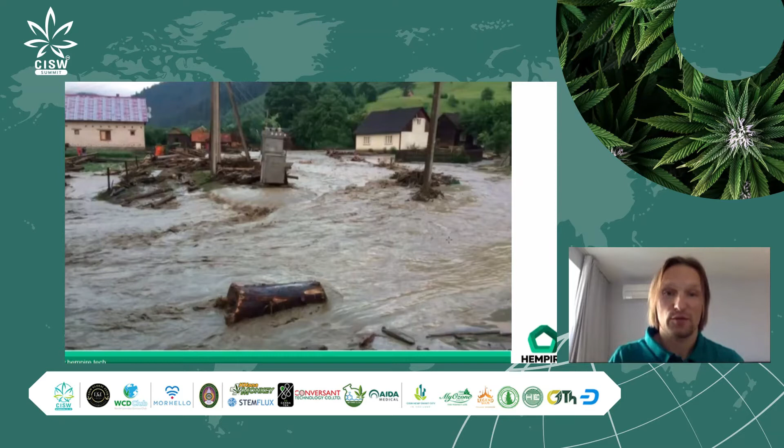The root system of one single tree can hold up to 10 liters of water. So chopping down trees at the top of the hill results in seasonal floods, and the village that sits right at the bottom of that hill suffers a lot. So we need to understand the consequences of what we're doing.

So basically, after August 1st, we're taking a credit line from the planet, and that's from 2016. So we see really bad results, and there is no way of stopping it unless we start using natural regenerative resources.

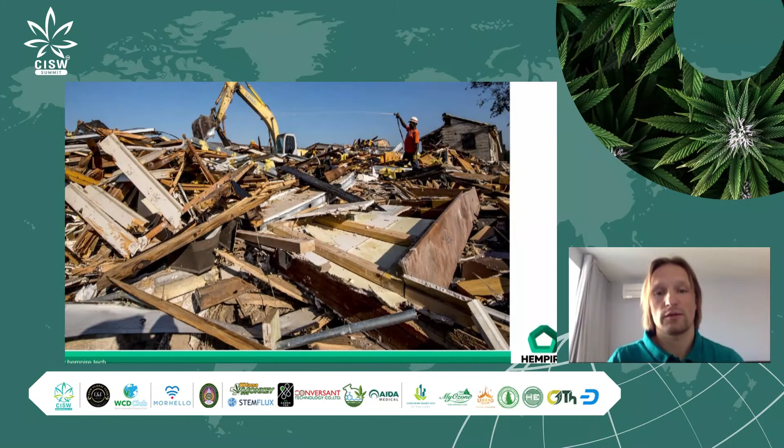Here, the amount of trash. I don't know if any of you have ever done renovation or construction. We have seen crazy results, and the amount of mass that is produced from one single construction site is very sad to see. I'm going to skip this step. So we started to build buildings fast. We started to build buildings economically, but the quality of materials was always subpar.

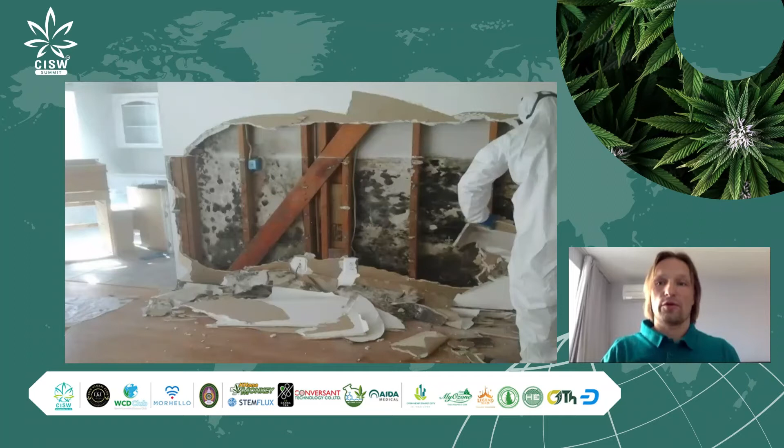As you can see, this is just a result of the mold growing behind your walls. Even though it's nice, beautiful gypsum boards, painted, beautiful house, probably costs a lot of money, the quality of air that people are breathing in there is detrimental to the health of the tenants.

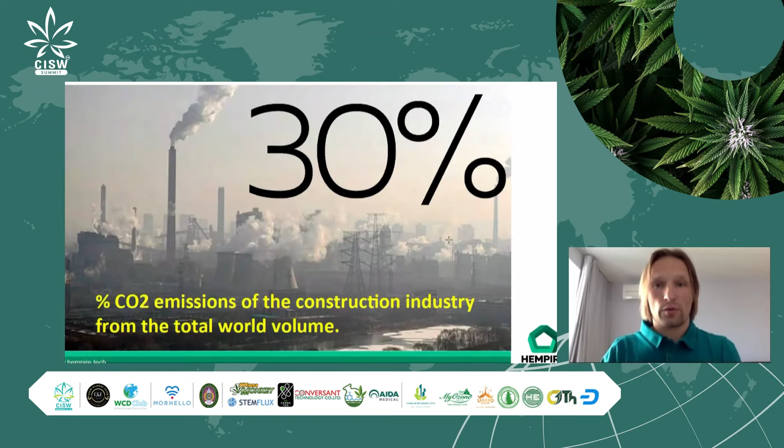So the construction industry is one of the biggest polluters in the world. About 30% of all the emissions on the planet come from construction. And of course, that results in low quality materials that create all kinds of health issues and massive carbon emissions. In order to produce something, you need to use a lot of energy. So the solution to all of this is, of course, carbon negative hemp houses.

And so the difference: the hemp grown for CBD is a bushy flower plant. The industrial varieties of hemp are also being grown for CBD, but it's a dual type crop. So you can take the top off and bring it to the extractor, and then the bottom, the rest of the stalk, goes to the processing facility.

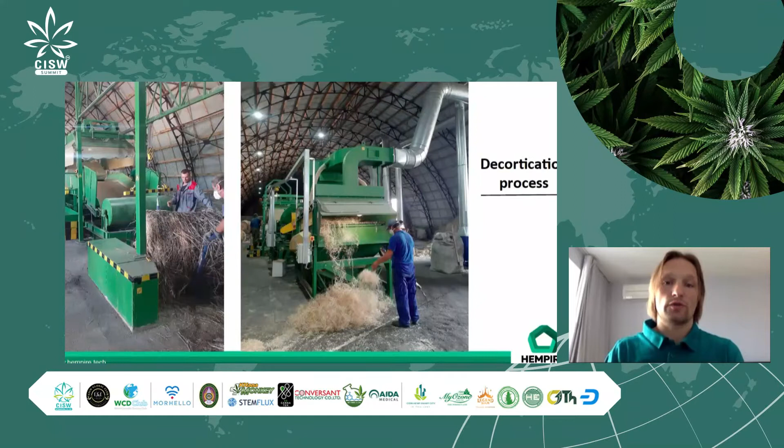So once the stalk is harvested, it's brought to a special facility. It's called the decortication facility, where they separate the fiber and the hurds. Fiber goes towards the textile industry, paper industry, bioplastics, and composite materials, whereas hurds were considered to be a waste before, but now we're successfully using them in the construction industry.

So in Hempire, we have developed our own all-natural binder, a lime-based binder with no cement or any type of toxic components. And basically what we do, we mix the processed hemp hurds and our Fifth Element binder in water for 1 minute in a specially designed mixer. And we produce a porridge-like substance. It looks like oatmeal mixed with flour and water, that sort of stuff.

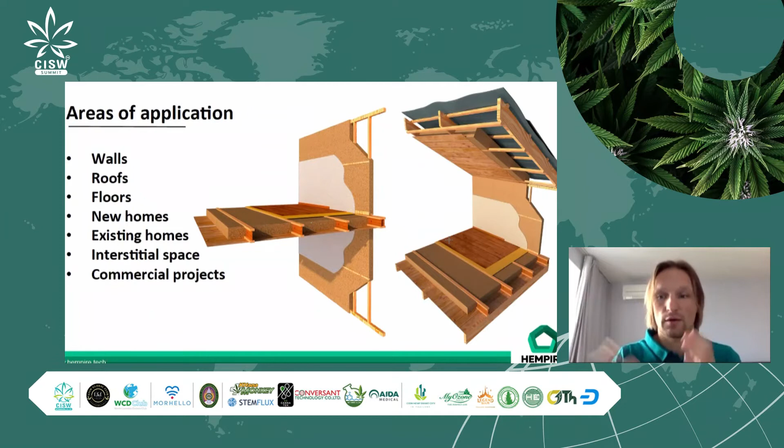And with this mixture, we can insulate any type of surface, walls, roofs, floors of new and existing buildings. So think about it. You have some type of crop that you grow on the field. You have a facility nearby which can process this crop, and it becomes one of the biggest sources for the construction industry to fill your walls, insulate your roofs, floors, etc. Next door.

So this is just an image of how it has been done. It takes a minute or two to prepare the mixture. Then we have, for example, a timber frame. It can be a bamboo frame. It can be even a brick wall. It doesn't matter whether it's an existing building or a newly built structure. So basically, we install the temporary formwork around your timber frame. It can be plywood or OSB, as you can see.

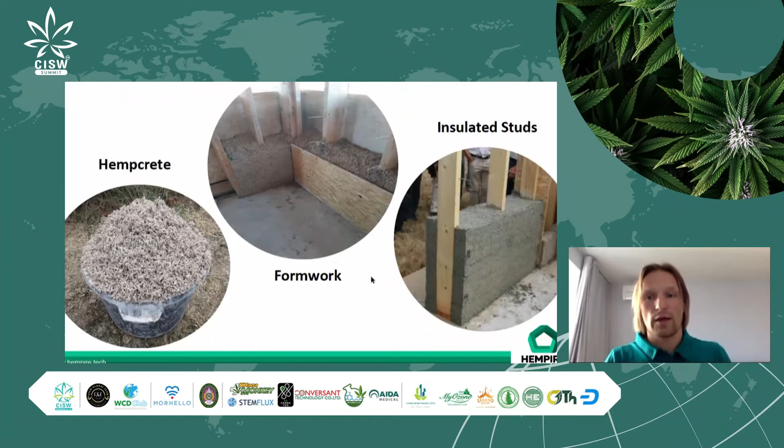And then we start compacting this material in layers of 10 to 15 centimeters. And the beauty of this technology is that we can remove the formwork instantly after we apply the material. And then it starts drying and turning into stone by sequestering carbon dioxide from the atmosphere. It's a beautiful reaction that takes place once you mix lime with water.

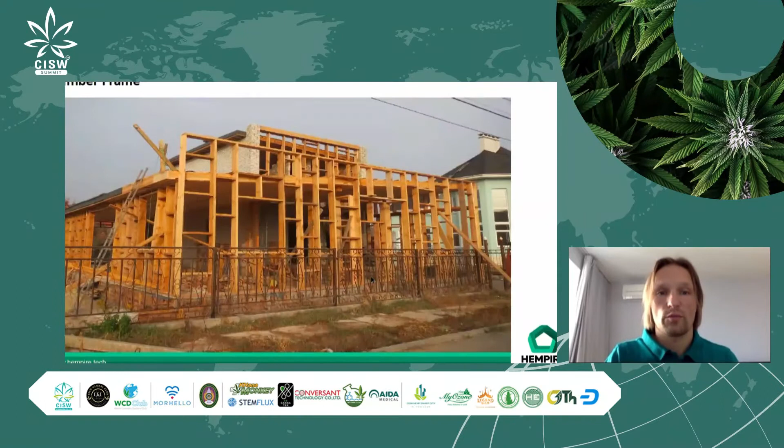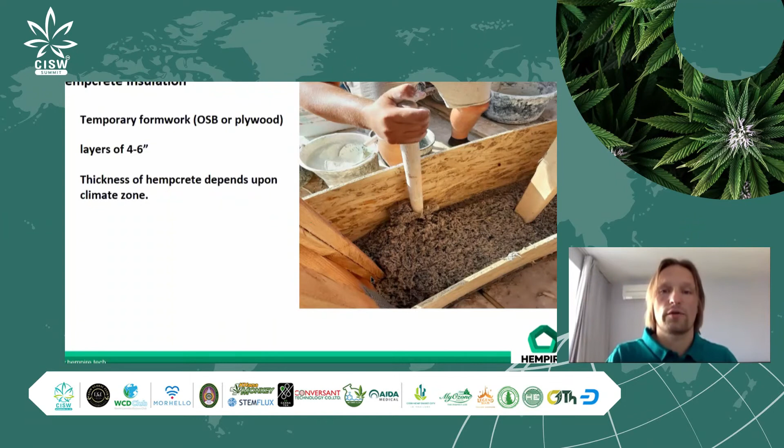So basically, here is your timber frame. Here is our formwork installed around our structural members, and we start throwing this material manually and compacting it very fast. So once you compact the layer, you can throw the next one on top of it, so there is no technological delay. We remove the formwork, we put it further up, and here we go.

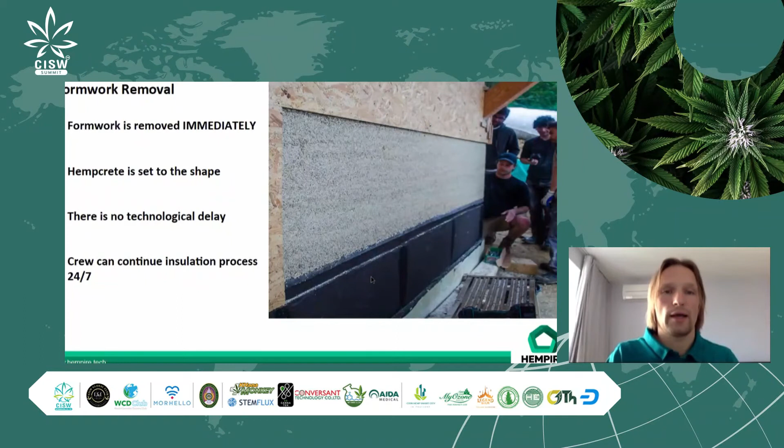So in the end, our timber frame gets fully encapsulated with this material, which is drawing any possible moisture out of your structural frame. So there is no possibility of mold showing up there, or of structural disintegration or collapse. Once you remove the formwork, you can place it upward and start filling up the next layer. So the more people you have on the construction site, the faster you can finish the building. And it's very, very simple technology.

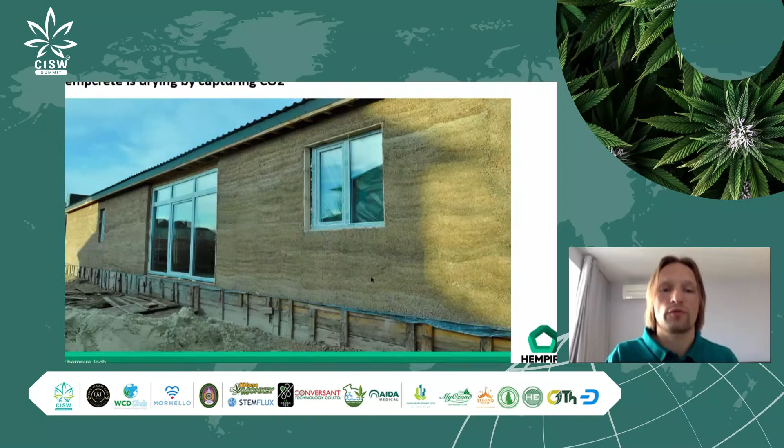And here we see, once we removed all the formworks and insulated the structural timber frame in the images shown previously, the carbonation process starts taking place. This is where the CO2 gets sequestered by the material from the atmosphere to make it a stone-like structure.

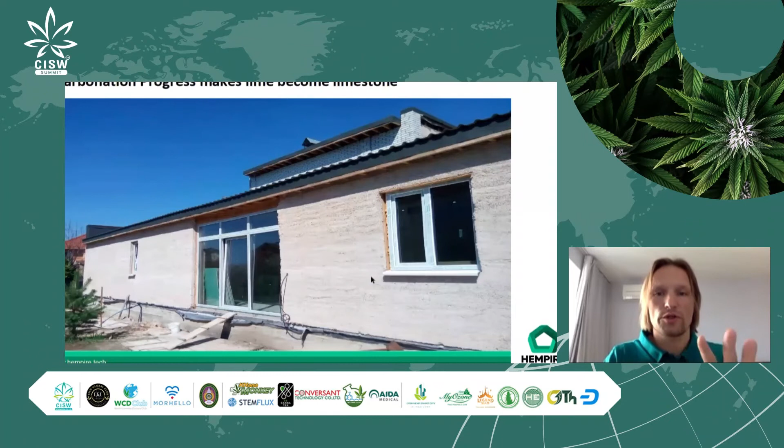So as you can see, there is no thermal bridging. This is all one uniform material, which will get plastered in the end, and the house is ready. So you don't need to use any type of membranes, because this material is not afraid of moisture. So we are completely eliminating use of toxic materials or some type of plastics.

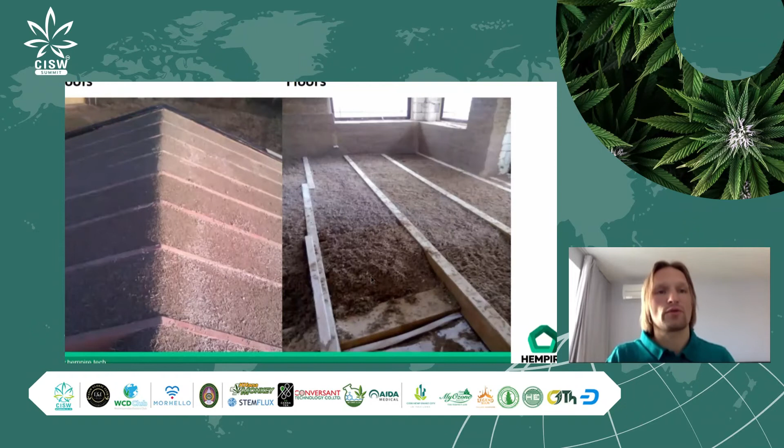So the beauty about it is you have your timber frame, you have your insulation material, which acts as a wall partition at the same time. You plaster it from the inside, you render it on the outside, and the house is ready. Here we have examples of roof insulation, floor insulation.

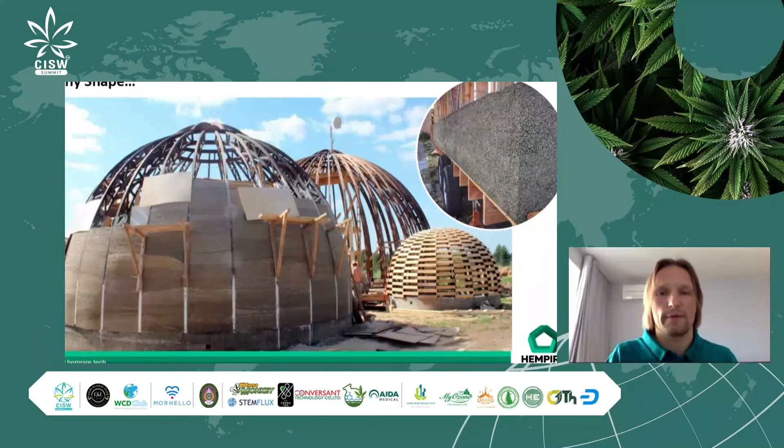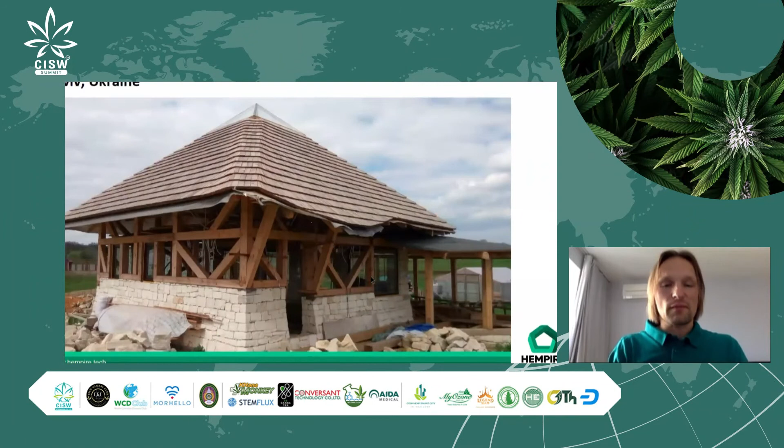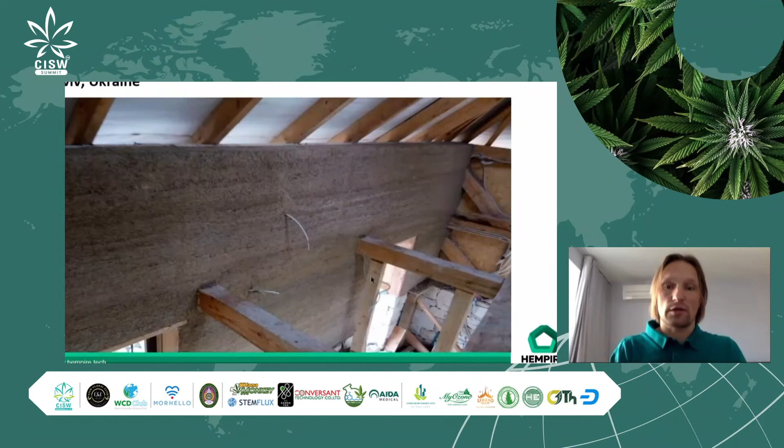Because if it's just a traditional brick wall or a gypsum board painted with some type of paint over it, it doesn't excite people. But when they start seeing this natural shape and texture, they absolutely fall in love with it. So here I'm just going to show you different types of buildings that we have completed, just to show you that this technology already exists. People have been using it. There is quite an experienced group developed around the world that's starting to use this technology.

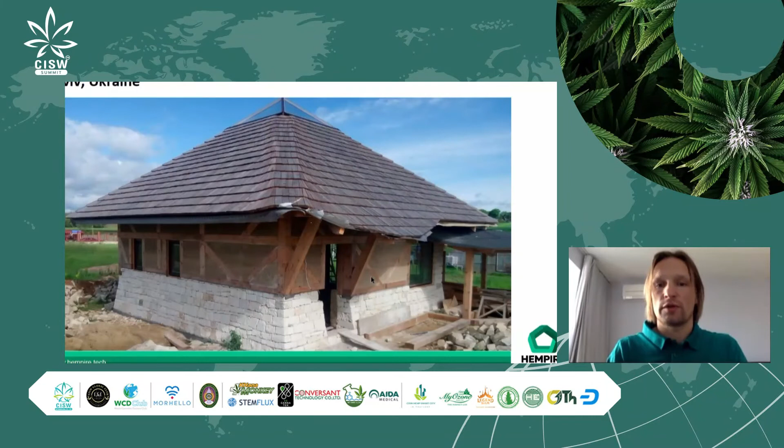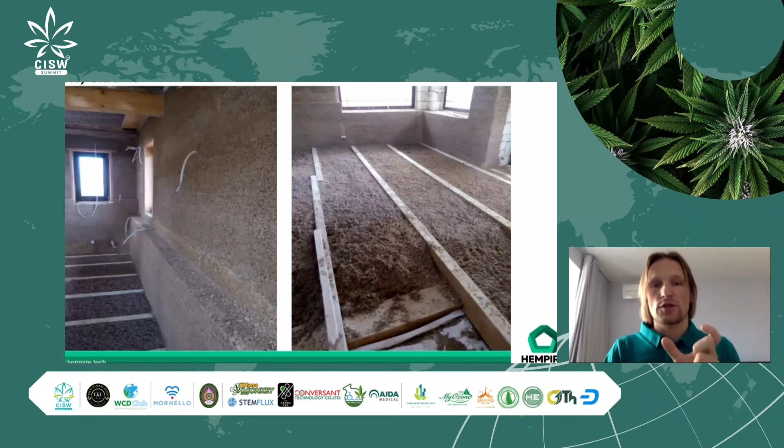I got introduced to hempcrete about 11 years ago, and it completely changed my life. Now we actually consult and help people build in different countries. The possibly next project is going to be in Hawaii for me next year. United States, of course. So here, as you can see, we see a stone house being insulated from inside, floor insulation. The thickness of the insulation will always be dictated by the thermal codes of different countries.

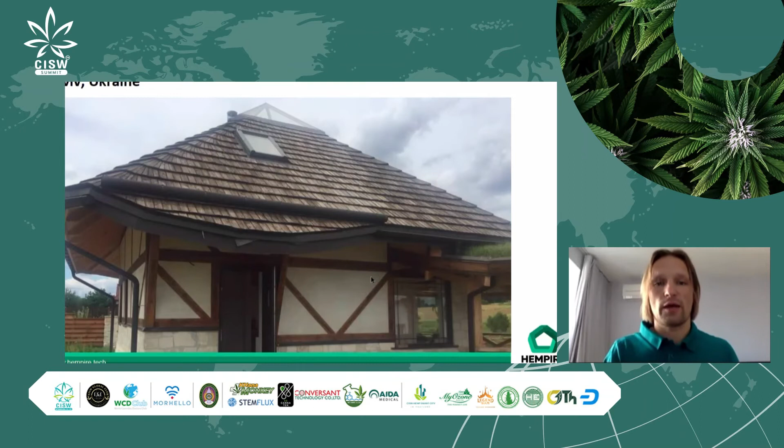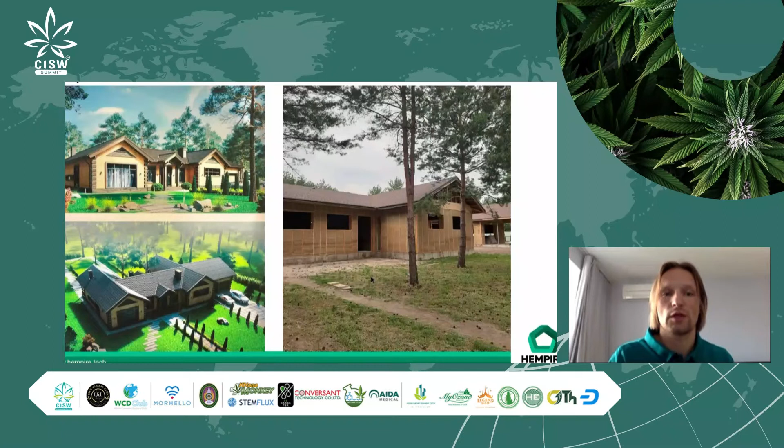One thing is building in Florida or Thailand, the other thing is building in the northern part of Canada, right? So the thickness that we use in Ukraine is between 30 to 40 centimeters, depending on the use of the building. So here you see there is no problem constructing big houses. So it's not just some type of mud huts that people are used to seeing. There are modern buildings that are currently already occupied by our clients.

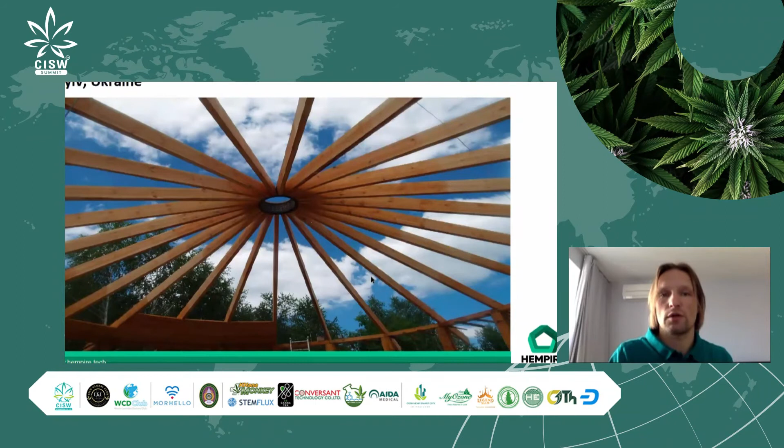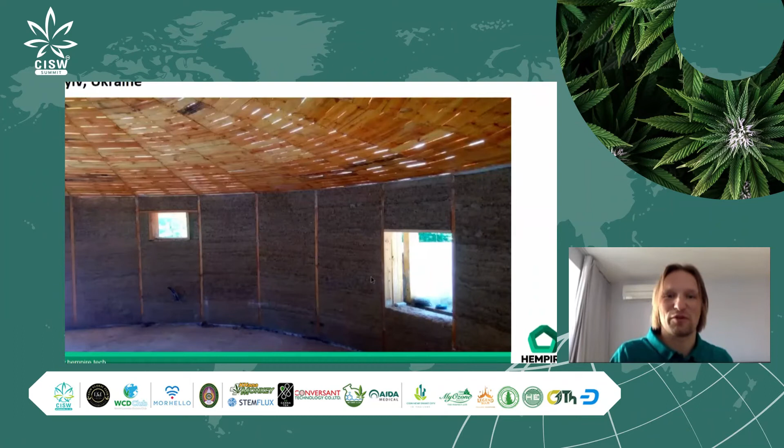All the projects, by the way, that you see are our own projects in Hempire. So these are all real houses, not just some render Pinterest type of photographs. Round houses, stone houses. Some of the clients request an all natural approach. They say, our children have some special allergies to plastics or cement, and sometimes we have to sign a waiver guaranteeing that we're not using any toxic components inside our formulations.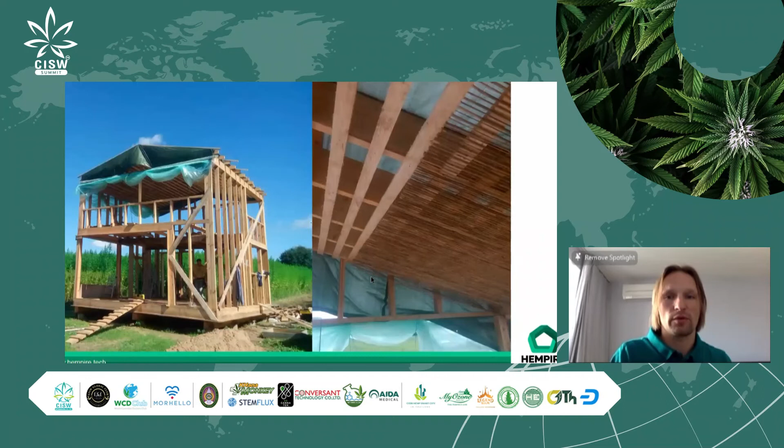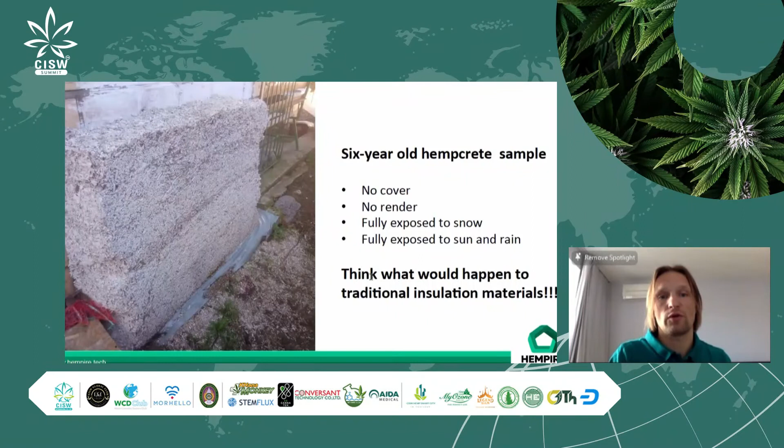Here is the seminar in Poland that we've been running with the local hemp group. As you can see, no one can tell the difference. No one can tell that this type of house is built out of hempcrete and cannabis plant. So as you can see, our sample has been sitting fully exposed to the snow and sun for the last 6 years, and nothing has happened to it.

We have insulated concrete inside during winter time, and now it's a beautiful yoga studio where people just enjoy themselves. Everything is covered with hempcrete floors, ceiling inside. As you can see, all the engineers, all the architects told us this material is going to rot, and there is going to be dew point condensation somewhere in between concrete and hempcrete.

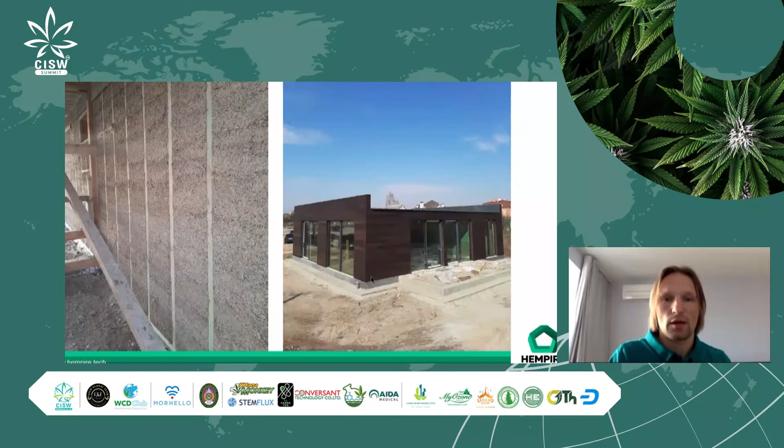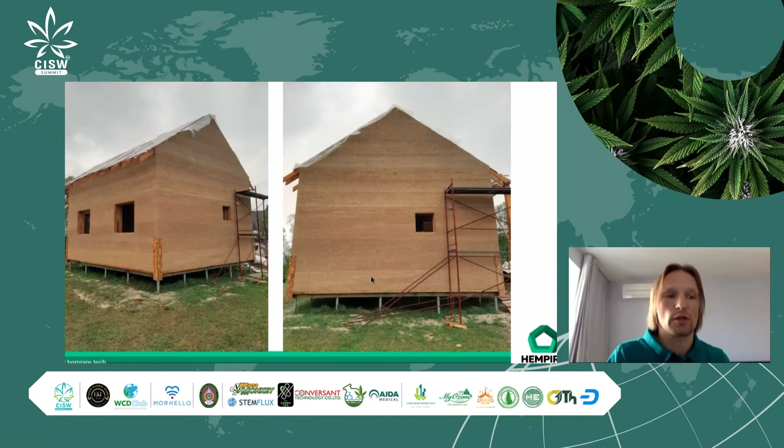It's hard as a rock right now, 6 years in succession. Modern types of shapes with timber cladding, dome houses, as I told you. But most importantly, I want to show you that some of our clients build houses themselves. They purchase materials from us. We teach them how to do it. We let them rent a mixer from us. And this particular project has been executed by clients. This is one of the outstanding projects that we got famous for.

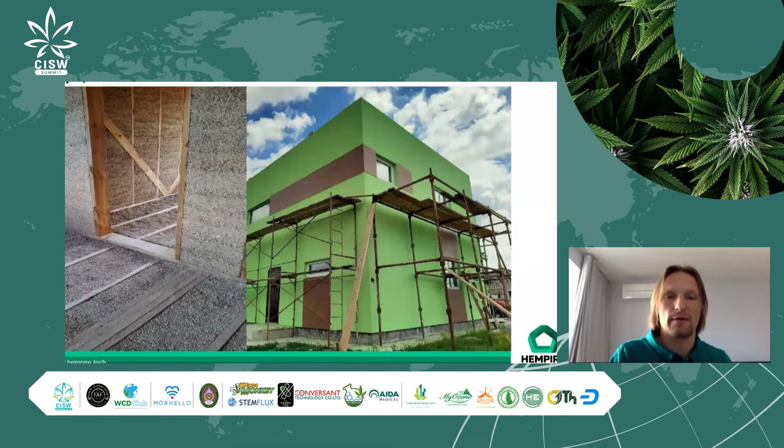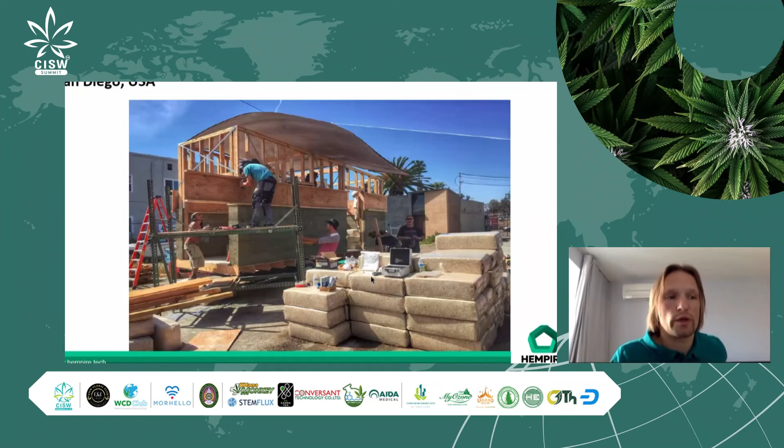This is a real house with the person who has built this house. He's now our partner in helping us build these houses. This is a Mont Blanc chalet, a very beautiful project in the mountains in France that we helped build. This is a house on wheels. These are all very cool types of structures.

But what is the point here? The most important thing is the advantages of hempcrete. As you can see on this diagram, the relative humidity outside the house is represented by the green line, and the blue line is the humidity inside the house. This test was taken in England.

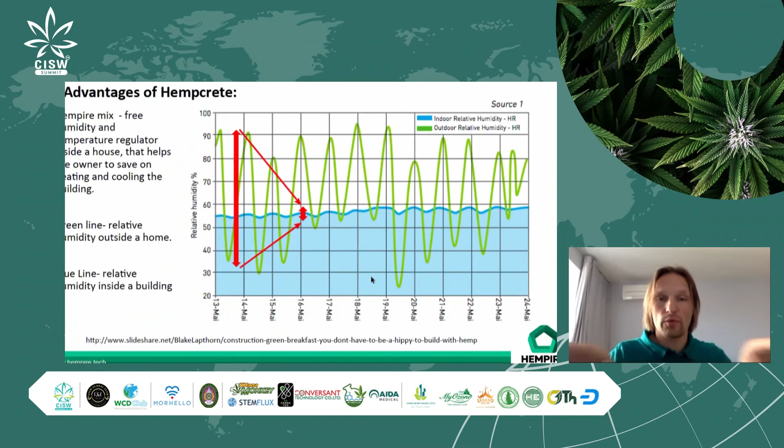As you can see, hempcrete has the ability to negate these extreme fluctuations of relative humidity outside the building, and what creates uncomfortable conditions is the actual humidity inside the house, if the air is too dry or too wet. So hempcrete has been doing this, creating a perfect environment from 50 to 60% relative humidity.

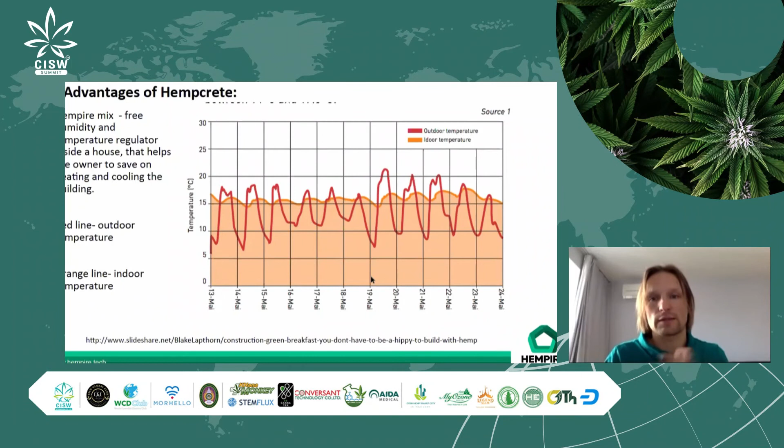The same thing's happening with temperature. As you can see, the dark red line represents the temperature outside the house, day and night throughout like 10 days. And the same is happening inside. So it's an extremely energy efficient material due to the fact that it's very porous.

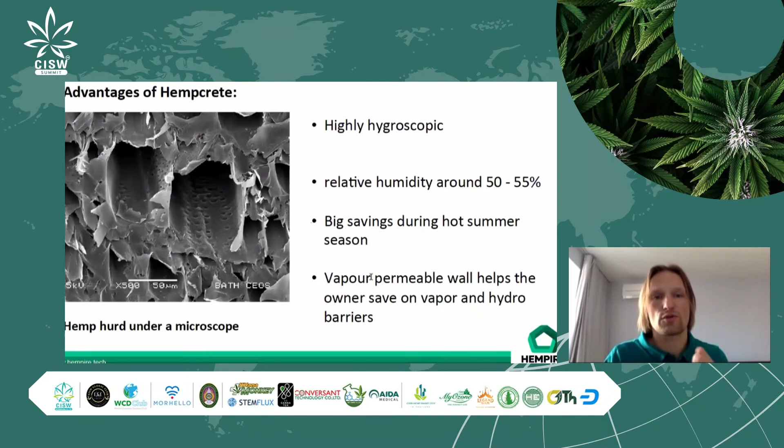This is an image of hemp hurd under a microscope. And due to its porosity, it's able to attract humid water vapor and then release it later on back into the atmosphere. Here, as you can see, the optimum zone. This is actually essential for the health benefits of the people living inside such houses. Bacteria, viruses, fungi, respiratory infections, they all happen in either too wet or too dry an environment. So the optimum zone created by hempcrete is cool.

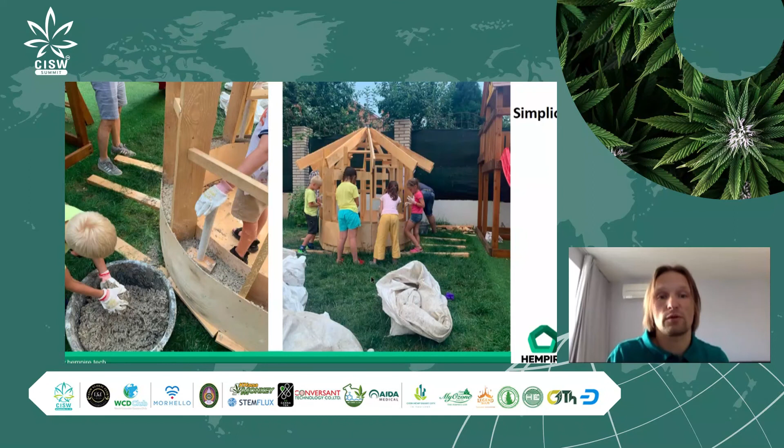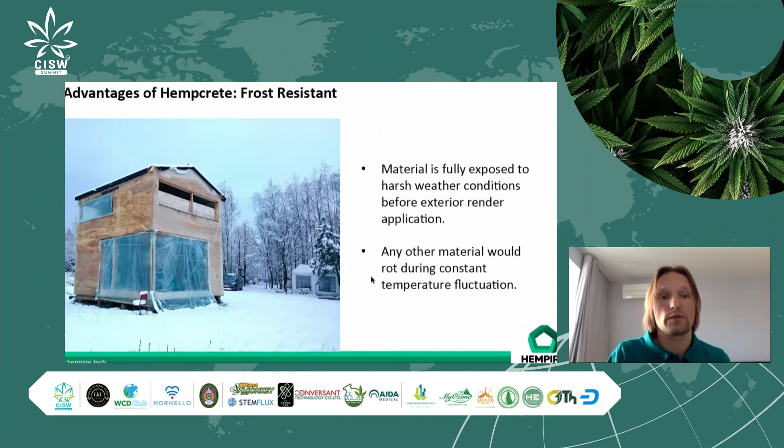We have organized the first ever, maybe in the world even, workshop for children. These are 7-8-year-old children learning how to do it. And they were very, very happy and excited about it. The material doesn't burn, it doesn't rot. As you can see, it didn't crack over winter time. So it's an extremely durable material that can last for many, many years.

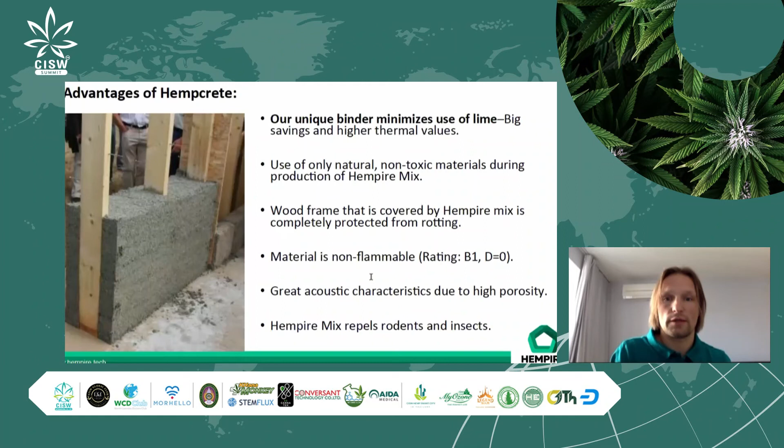It has very good thermal insulation values. It has great acoustics. It is also very good at sustaining different seismic activities. And a very important slide here: this is a pH scale. At 5.8, cancer cells begin to form. And we're using 12.4 pH lime. So it's an extremely alkaline material.

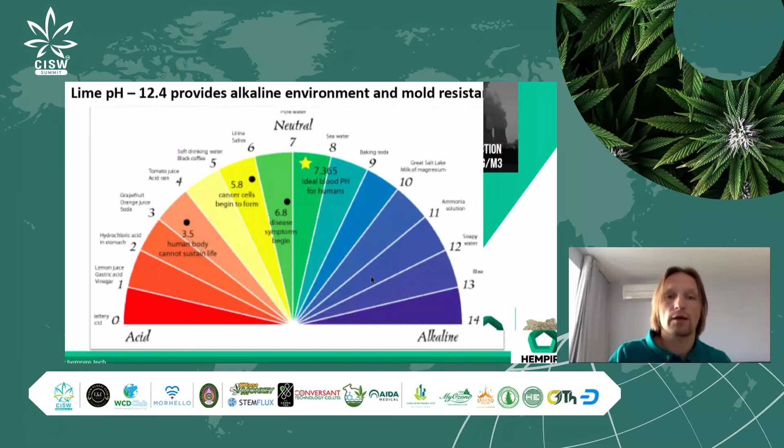And the most important thing is it is a carbon negative material, since 1 hectare of industrial hemp can sequester up to 10 tons of carbon dioxide during a 4-month growth period. So in the end, we have a material that sequesters more carbon than it emits. In comparison to traditional insulation materials, it has a huge carbon sequestration benefit.

Of course, there are some weaknesses: cost, labor demanding job, lack of material, and skepticism from the construction industry. But we see that people are showing more and more interest in these technologies. We have won some awards on the international scale. This became a purpose of my life, and now we are educating other people. And now we are ready to set up different hemp processing facilities where we will be producing blocks and panels.

If you're looking for an investment project, please contact me, because we are right now in communication with different countries where we're going to be setting up these multifunctional hemp processing facilities, which would be able to supply the market with consumer end goods.